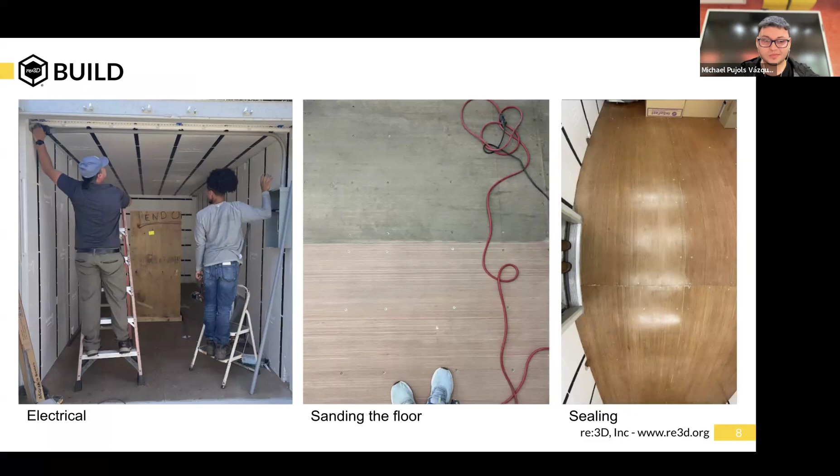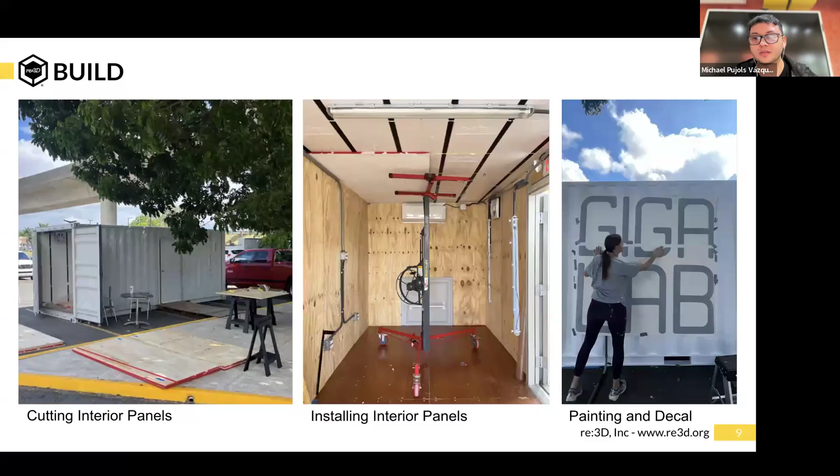The Giga Lab arrived with the two bots and a granulator, which are the basic tools to start, but we needed to outfit it. We started with electrical. I sanded the floor, sealed the floor, cut the panels, and put up the ceiling panels. Samantha helped me out with painting and adding the decal, so now it looks kind of presentable.

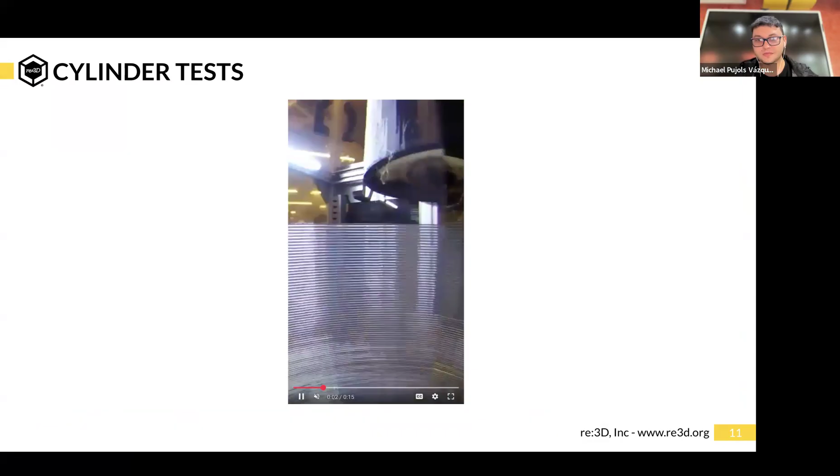It's a very cozy working space for creating different designs. But before creating designs and testing materials, we started with a very basic cylinder test. That's how I spent a couple of hours just trying to tune different temperatures for the materials. I started off with pelletized rPETG from recycled water bottles.

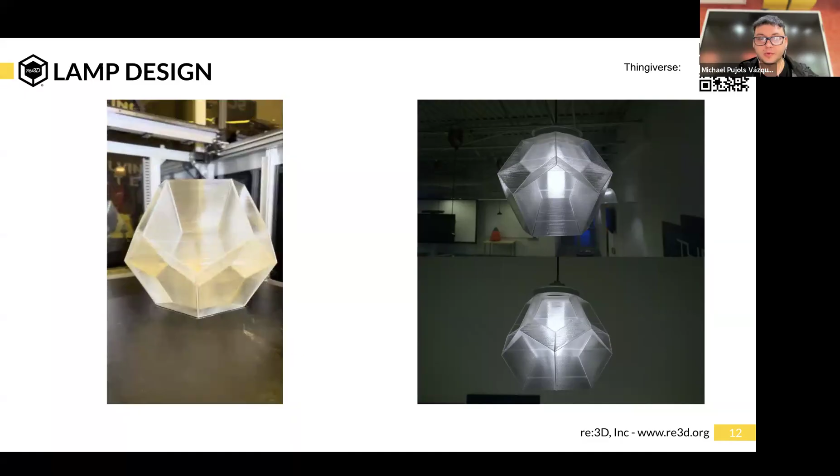I printed it with an 1.8 millimeter nozzle, with hopefully dried rPETG at that time. It was a lot of learning experience with this one as well, because I had to design the tool path so it wouldn't bridge with itself, while maintaining the walls as thin as possible so the light could come out.

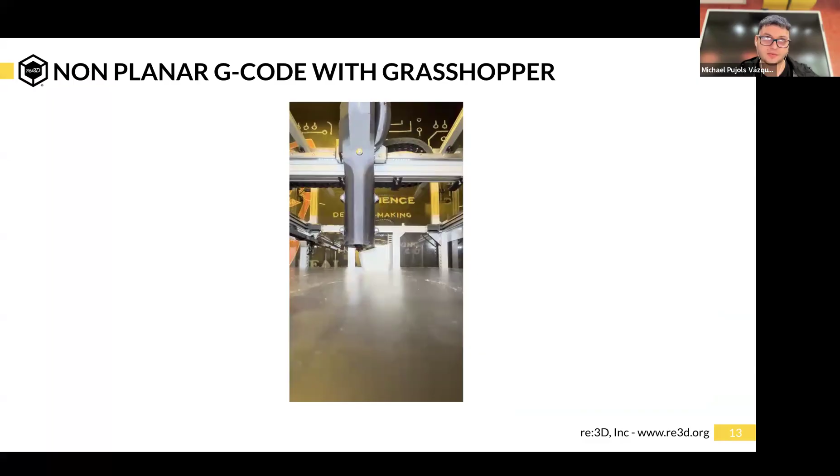After this, I tried to tackle a challenge I had in mind: can we 3D print non-planar on the Gigabot X? And the answer is yes. It's also more complicated than I thought it would be.

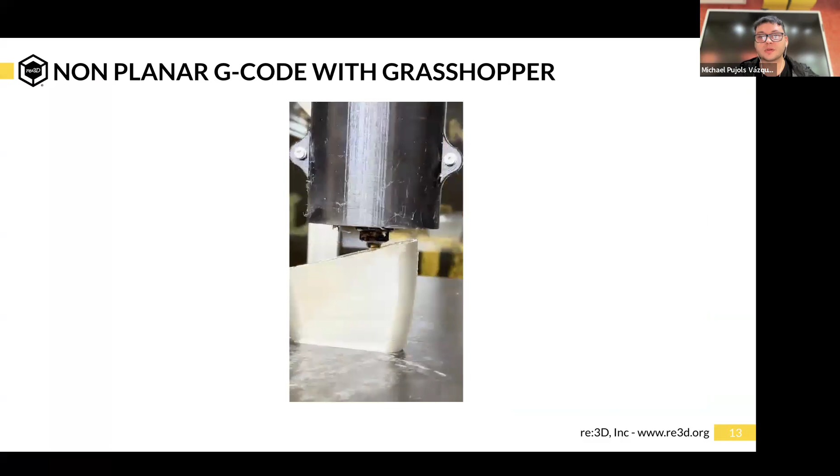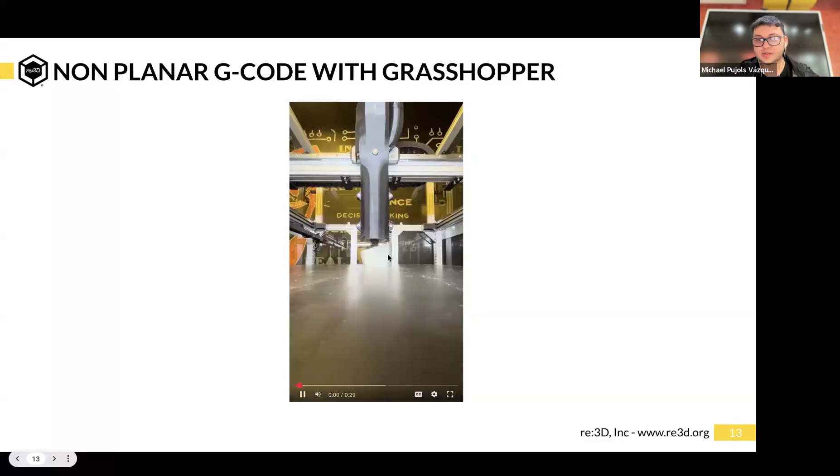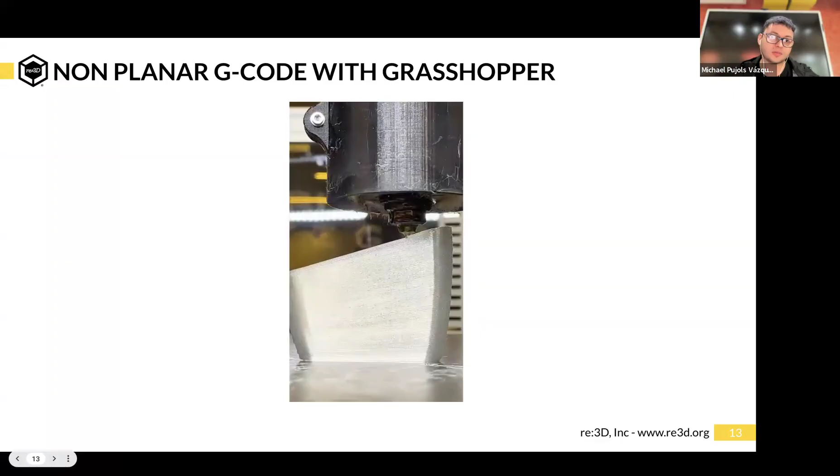A lot of this process isn't just about the speed of the printer, but also extrusion speed around the corners. As it goes down, it starts to create pressure and material buildup on the nozzle, and as it goes back up, it starts to over-extrude because of that buildup on the back side of the print. It's not really visible there, but it's an issue that changes depending on the geometry of the part.

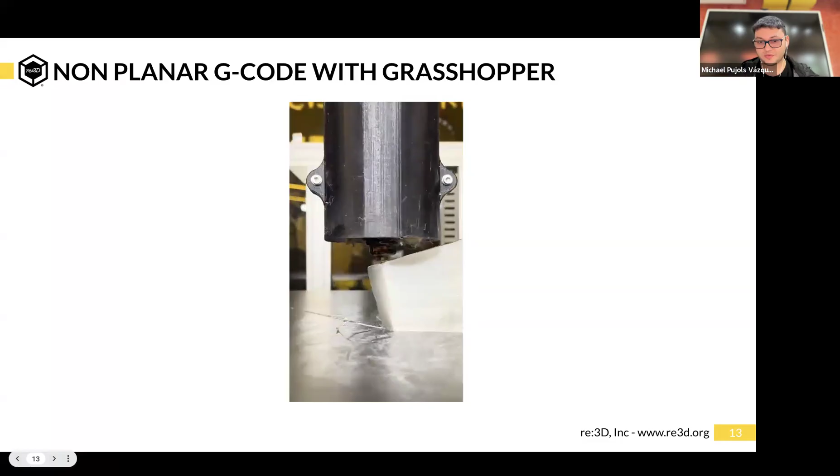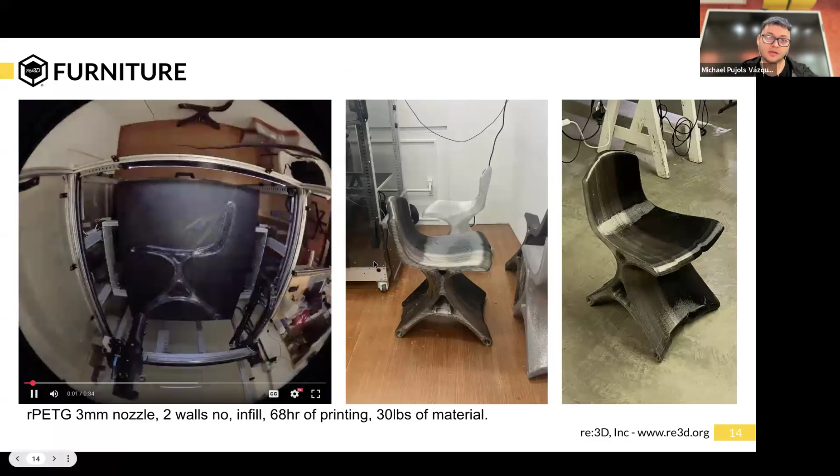I wanted to try this out as a small test, building a chair with this sort of geometry, starting with non-planar layers so that each layer could properly support the chair. Each layer would be continuous, or the same length in theory, instead of being shorter lengths as it goes and builds itself.

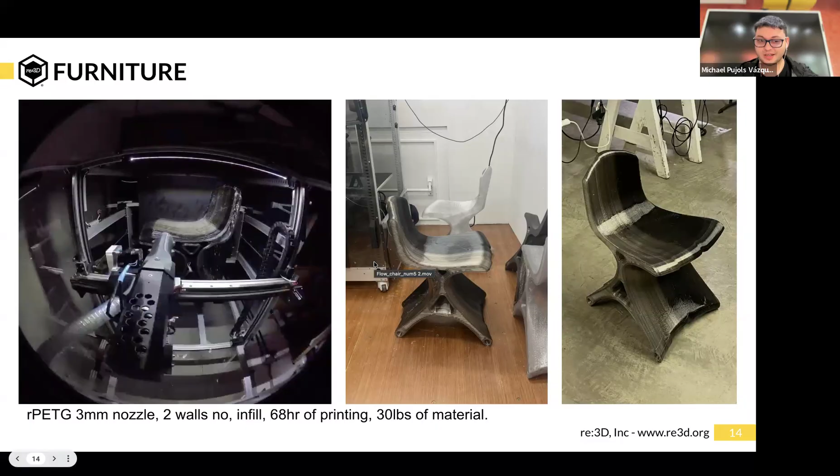It was a lot more challenging, so I ended up going with the normal planar, layer-by-layer printing instead. I printed a bunch of chairs. A couple of them didn't print completely because the electricity went out a couple of times.

It took 68 hours of printing and 30 pounds of material, with a lot of time in between each attempt. But this one finished. I got to finish this chair, and after a couple of hours sitting on it, I asked a friend if he could test it for me.

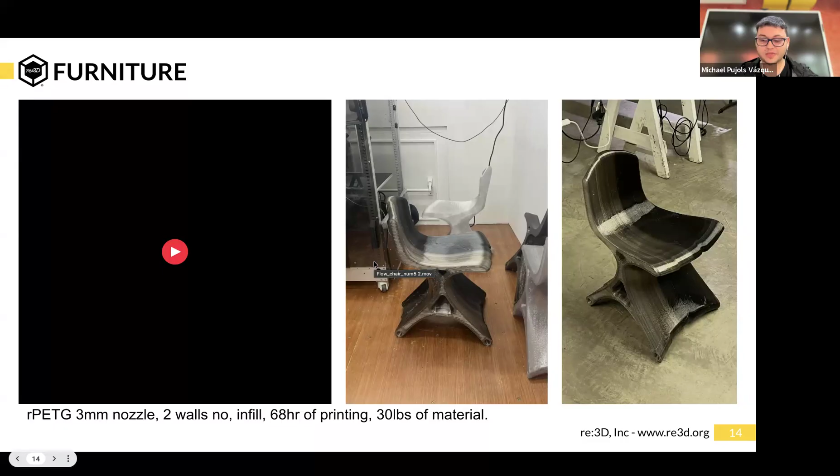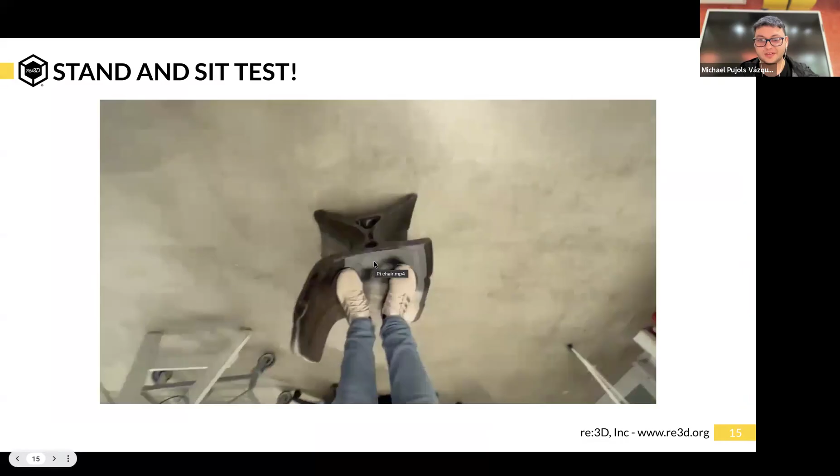He's a little heftier, so I asked him to sit on it and help me figure out how to break it, because that's part of the process. This is the chair itself, and here I'm demonstrating how it could hold weight, at least my weight. I got to stand on it and sit on it for a bit—I like the backrest, it actually helps out a little. But when my friend tried it out, he instantly broke it.

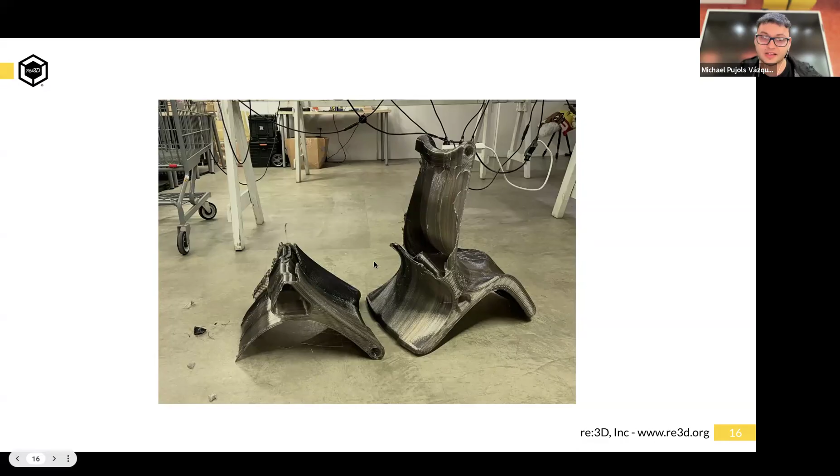He told me he only used about 10% of his power. The only thing he did was put his foot on one of the corners of the chair. I should have done a finite element analysis on that to see if that corner would have taken that much force, but lesson learned.

Before printing, try doing a finite element analysis on the design. After this, I wanted to try out a different design and learn to what extent the printer can bridge to a certain height. I came up with a design where each of the legs converge at the top and create a little bridge that becomes the footrest area for the stool. It worked pretty well, and I got away with at least halving the amount of material from the other chair. Instead of 30 pounds, it's 15 pounds. Pretty good progress.

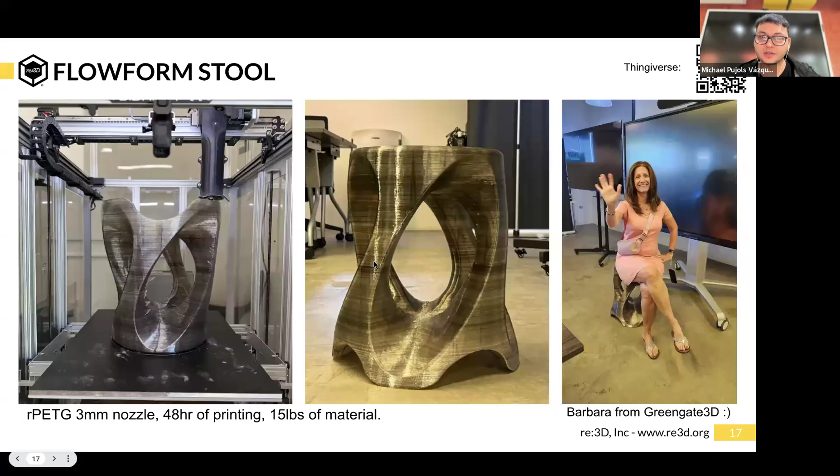It did sort of work, until the wind started to pick up really heavily, and then it went up, and as it kept getting higher, it snapped in half and fell, and I almost hit somebody. That person wasn't really happy with what they were looking at.

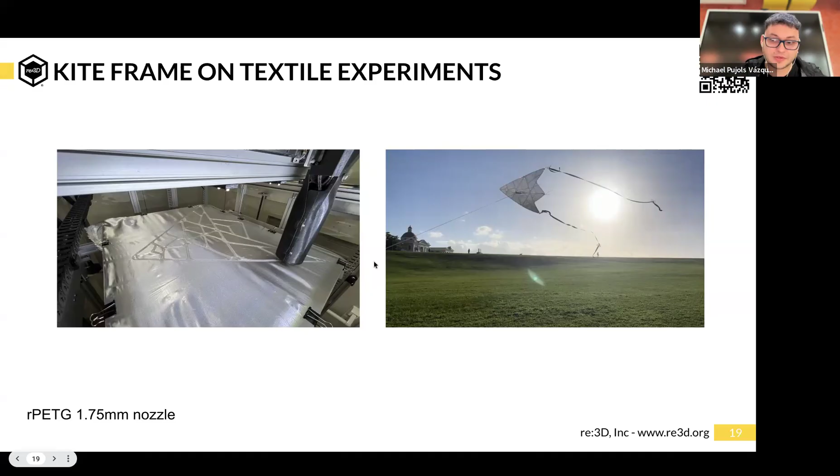Jumping again, this is a really cool project that started with the GigaLab, more of a collaboration with Emely. She had a rotationplasty surgery because she had osteosarcoma on her leg. So she got amputated, and rotationplasty is a very interesting surgery where they basically cut your leg, cut your foot, rotate your foot, and weld your foot onto where your knee is at. So the ankle works as the articulation, as if it were your knee.

Osteosarcoma rotationplasty amputees have very unique geometry for a prosthetic. Since she was very young when she had the surgery, her dad wanted to design a cover for this prosthetic to mimic the shape of a leg, so it could help her develop a relationship with that process.

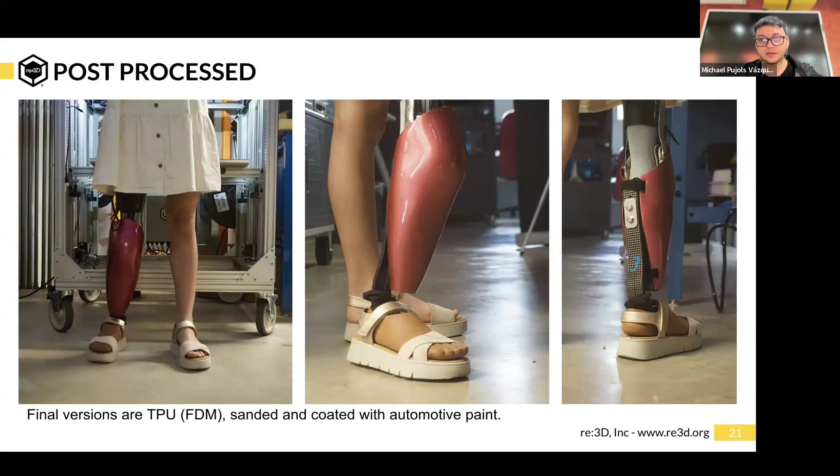But we started prototyping with TPU and got great results. We started printing FDM TPU, and we also post-processed that TPU with automotive paint, and got a design for her that she feels really good with. So good, in fact, that she travels from Puerto Rico to Boston every couple of months to change out her prosthetic leg.

But also her friends wanted a similar cover, so we got to make her friends the cover for them as well. This is one of my favorite projects because it involves so many things from 3D scanning to 3D printing, and also that post-processing part of sending over the TPU prosthetic leg cover and getting it painted, and seeing how they feel with the cover is very gratifying in that sense.

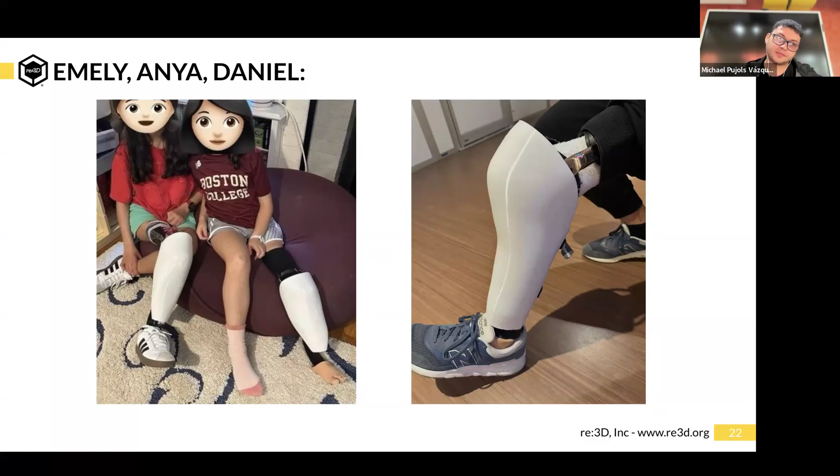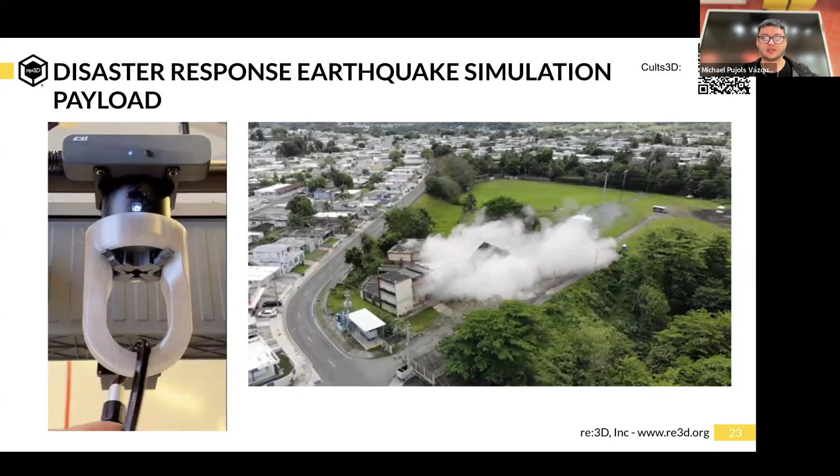And so this is a very random project. The mayor of Bayamon came over and dropped this huge drone on a table and told us, "Hey, I need you guys to design a part that would hold a care package and drop it if there's an earthquake happening. And there will be an earthquake simulation in a couple of weeks, and we kind of need this for that demonstration." And this was a whole thing.

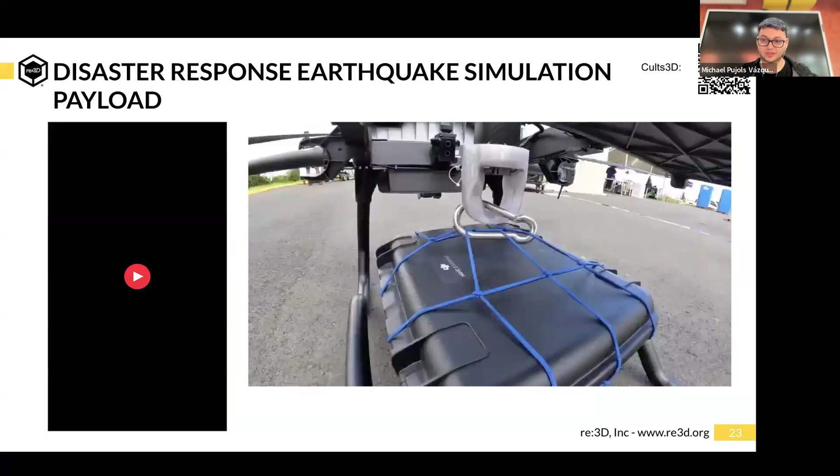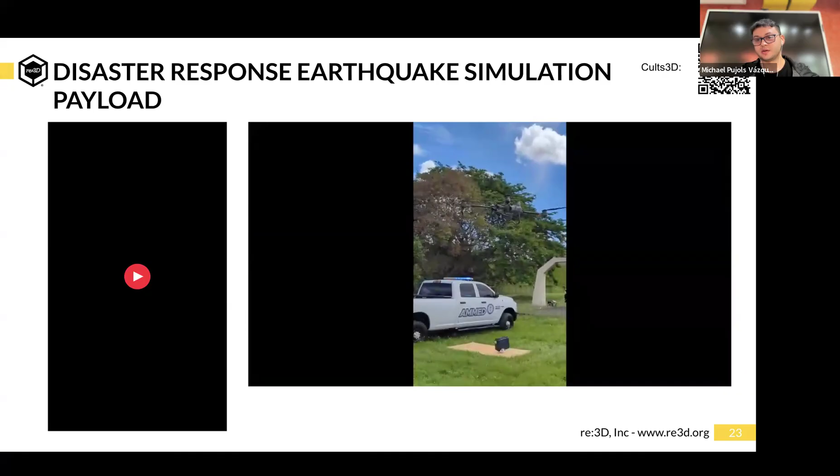They demolished the school and hired a bunch of actors to play as if that whole earthquake was happening. And this is all just a demonstration of how disaster response could aid in an earthquake. So they also had ambulances come by and police and a bunch of stuff, and it was a whole thing.

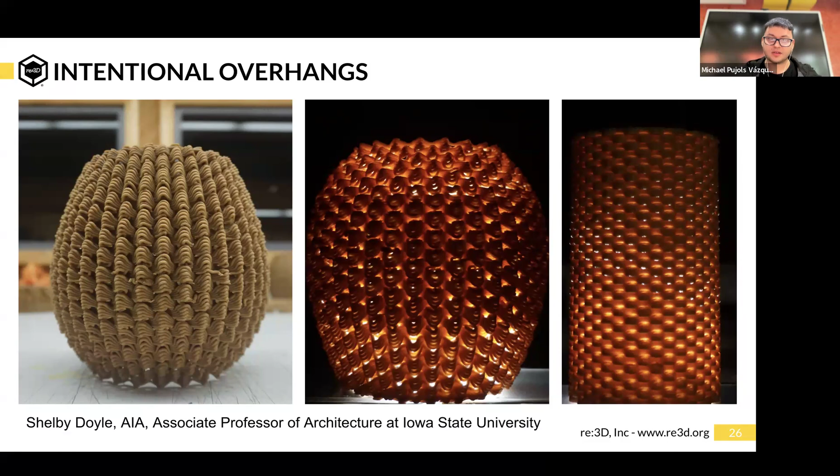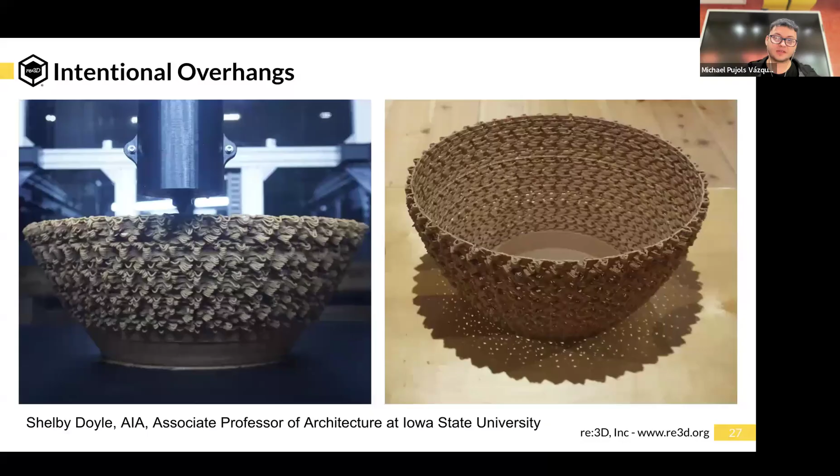And this is another one. This is a bigger sort of weave basket. It kind of looks like ramen. It's not. This took about all night to print, about 8 hours. Yeah, it was a really interesting experiment.

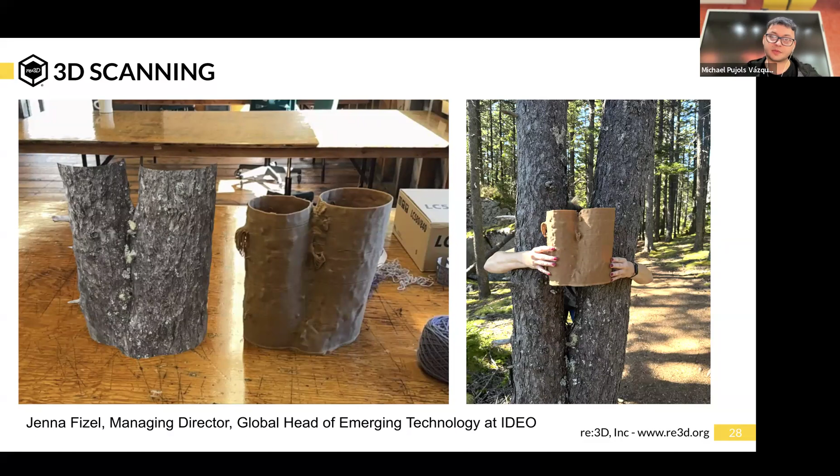Again, one of those things that happen when you gather a bunch of interesting people together. As it was basically a hackathon, there were a lot of coffee mugs around the studio area, and we had to take those mugs from the studio area to the kitchen every day, but they started accumulating over time. So I designed a coffee mug for that specific problem, because we were too lazy to bring the coffee mugs back from the beginning. So at the end, we had too many coffee mugs.

And the kitchen staff loved it. We made a couple of them for them, because it appears that sort of problem happened before with other labs and other workshops. So I got to leave a little bit of a design there as well.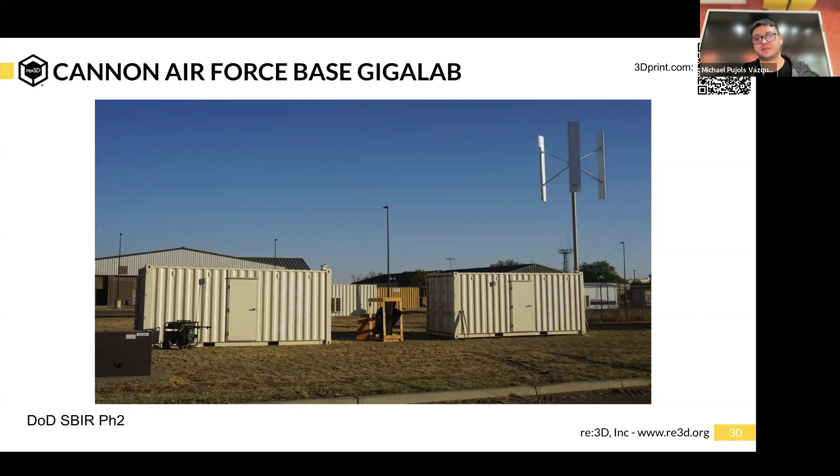So now jumping from Haystack Mountain over to New Mexico at Cannon Air Force Base. This is a DoD SBIR Phase 2, another GigaLab project. It's a really cool GigaLab because this one is powered, at least the right container is powered, with a wind turbine and batteries. And then the left one is powered by a generator because the granulator needs a little bit more juice.

But this was a really cool demonstration where we got there, set up the wind turbine, got the batteries running and the printer working, and got to train airmen how to use Simplify3D to 3D print their models. A lot of them wanted to print things that were a little difficult to print on the GBX, in the sense that the tolerances for these parts are designed for smaller nozzle sizes. The GBX goes from 0.8 millimeters to about 3 millimeters that we've tested.

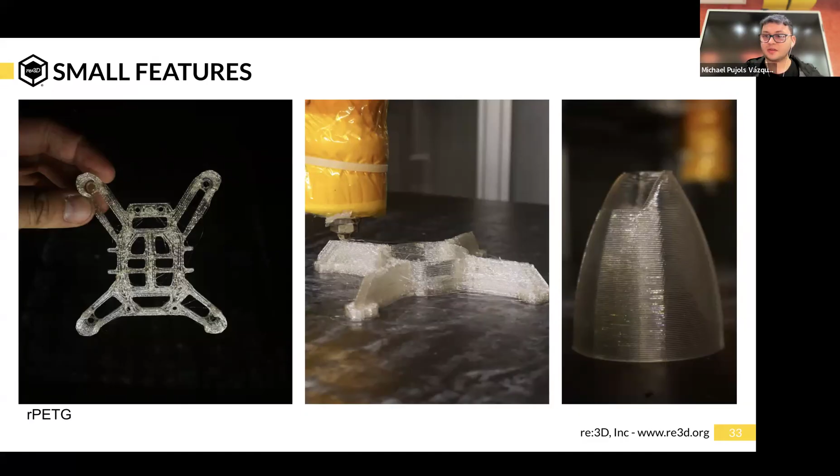And yeah, they wanted to try these out. We printed them out. The features were too small, and also in this case the PETG was not dry as well. But a lot of learnings from this as well, at least for them, to show them that you also need to design for the machine or the constraints of the machine, not just take a model, throw it at the printer and see what happens, sort of thing.

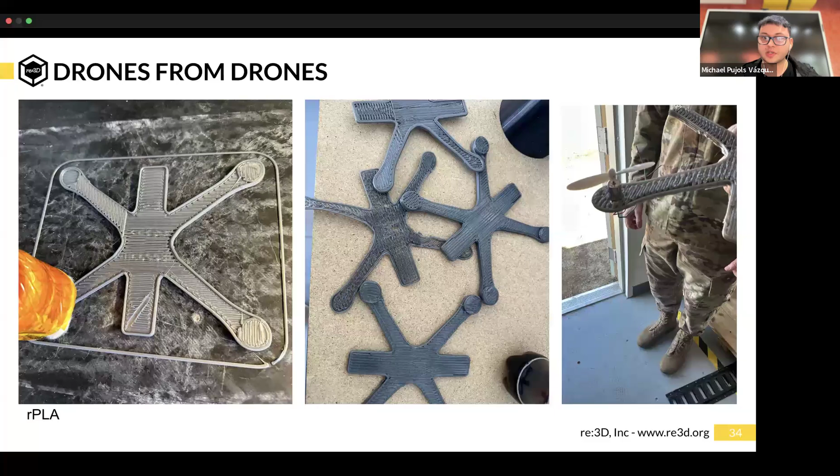And then from that project, we took material from discarded drones and 3D printed drone frames. This is also a very interesting process where we got to show that if you get the right geometry and the right tolerances, you can actually get a good result. And the team got to fly a 3D printed drone from this, which is really interesting. A production of drone frames can be done in under 30 minutes, which is fairly quick. You can have different iterations and churn out designs pretty quickly with this nozzle size.

And also we got to design a cable management little strap, a suggestion from a staff sergeant that works with the cybersecurity department. She wanted to design this little strap thing, and we got to do it on site as well, which was really cool.

And then jumping from New Mexico over to the Pacific, thanks to America Makes, we got a booth at PACIFX, which is a conference where a lot of DoD and companies get to show off the technology they're developing. At this Pacific conference, we got to show off the GBXS printing our LDPE foam that will eventually be used for packaging foam for the International Space Station.

It's really cool to show off a lot of good ideas. Some people suggested maybe doing this sort of system configuration for submarines and that sort of thing, which was really good feedback. But Patrick can attest to how this project is going. If you haven't seen Patrick's presentation, you probably should go watch it. It's really cool. He does a lot of really cool NASA stuff.

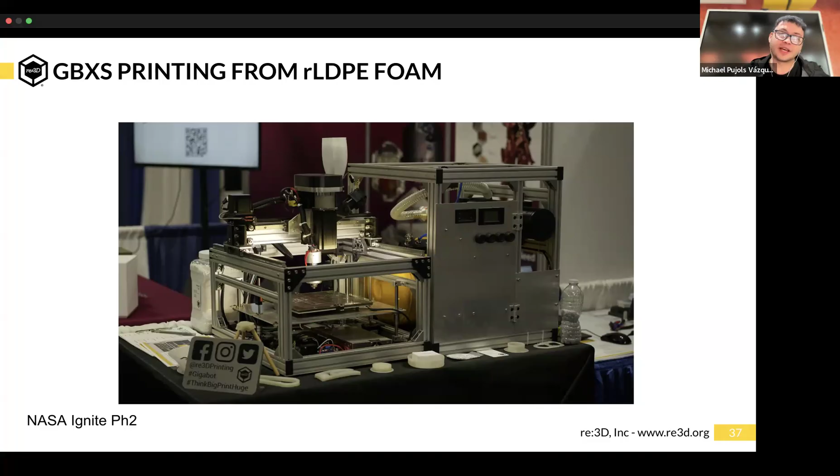And at the end of the week we got to show a lot of the demo parts we make for DoD at the PACIFX demo, which was like a 3 hour demo. Got to print out drone frames. A lot of the learnings that we took from Cannon Air Force Base, we got to showcase here. There were a few drone frames that we got to print out every 15 minutes or so as we were talking and demonstrating, from granulation to actually printing on site, which was really cool.

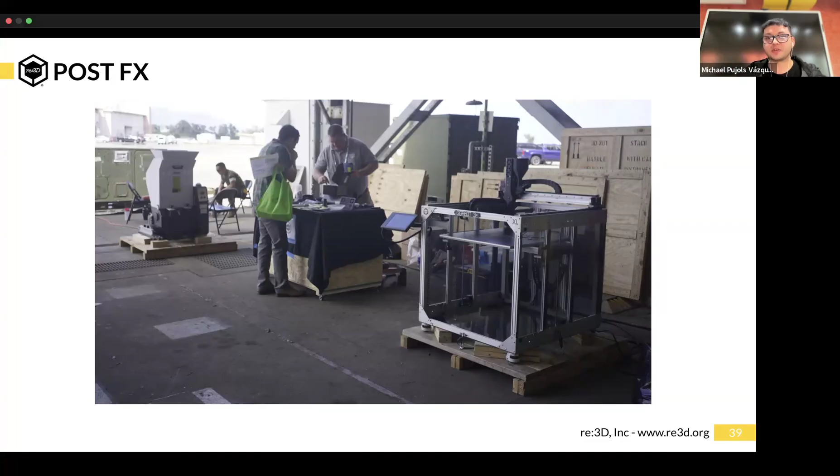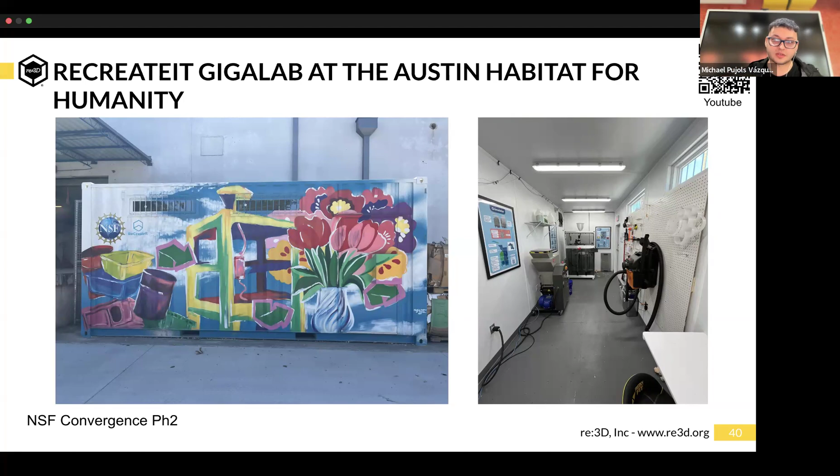And then jumping from Hawaii over to the Austin Habitat for Humanity ReCreateIt GigaLab. This is a really cool project that starts from an NSF Convergence Phase 2 grant. So in the interior of this GigaLab, you get to see how maybe building out the GigaLab from scratch isn't the best starting point. It's a really good thing to have an already built out GigaLab, and you can have it running parts. The team at ReCreateIt are doing awesome things with the GBX. They're actually making things and selling them at the ReStore, which is amazing.

It's a really good demonstration of how you can take donated waste to actually sell them at a local shop, and that's super cool. And so relating to Austin and design and that sort of thing, I got approached to maybe help out a little bit and design something that could be related to Austin. And I got a list of things that I have to make for the ReCreateIt team.

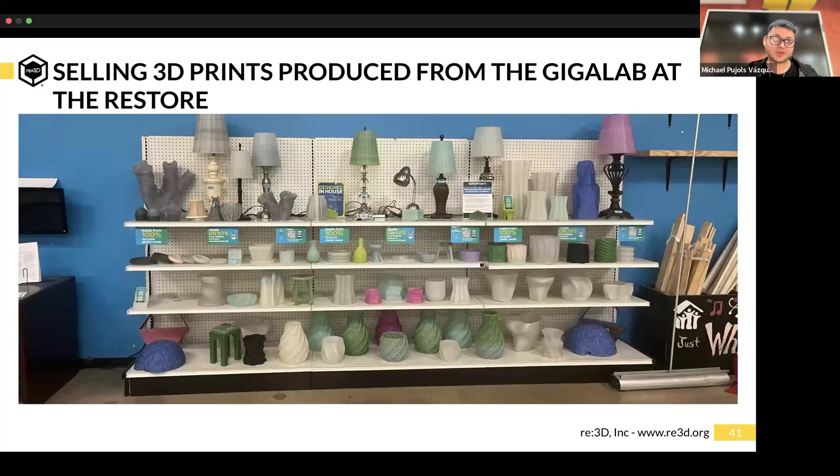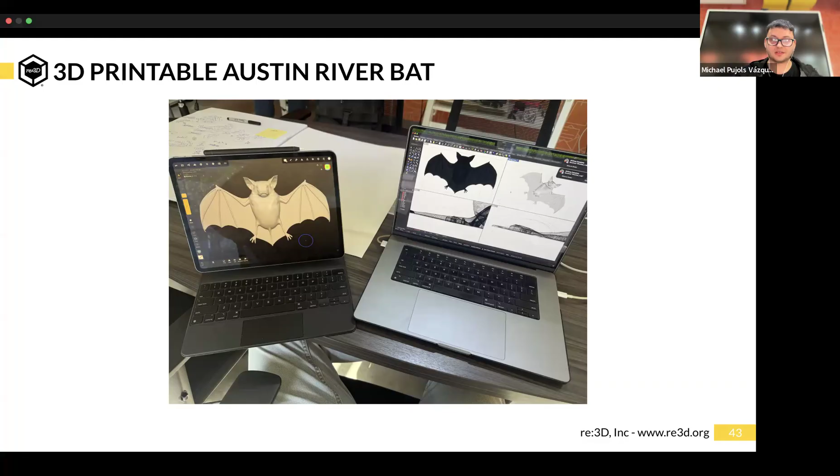And I got to learn a lot from this as well in terms of material. I got some recycled polypropylene from local industrial waste, and tried to 3D print my own design on the GBX and had no success. And basically, I started asking Chris what am I doing wrong, and if he can help me tune the design a bit. And basically he gave me a lot of really good guiding principles.

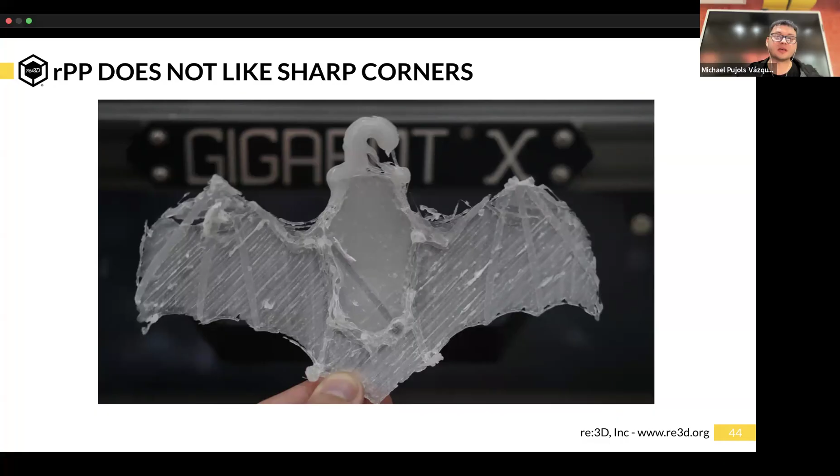RPP doesn't like sharp corners. This design had a lot of sharp corners in the wings. So it started to drag material from the corners, and basically would come loose from the print bed even if I put adhesive on it. And so I edited the design a little bit. Still has a little bit of sharp corners on it, but even less so that the design could sit a little better on the build plate.

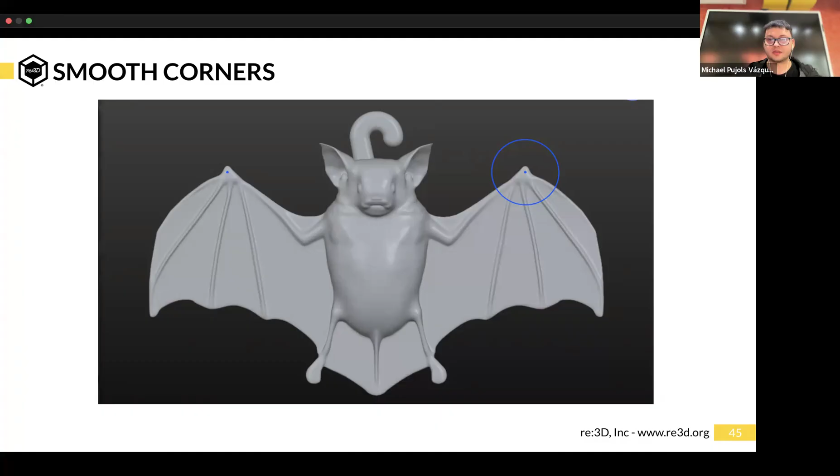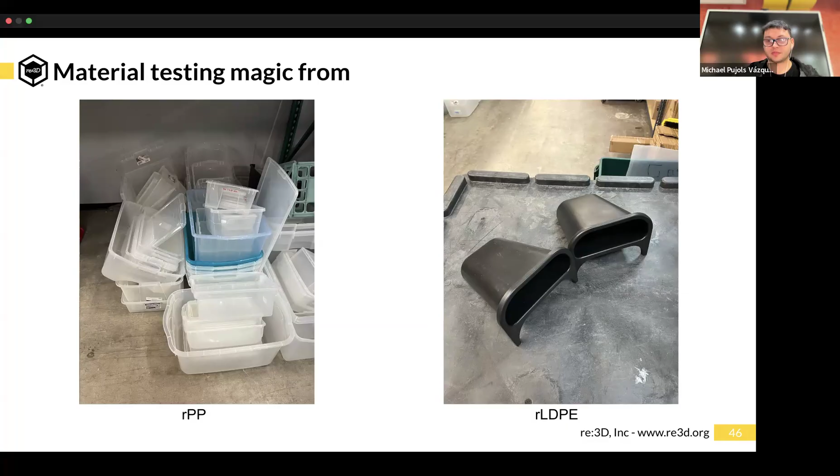It could also be material. There could be a material thing happening there where maybe the RPP that I have, the thermal cycles are a bit different than the other ones, but it's coming out really good at re:3D. So the re:3D team has these materials so far. They have tote containers, and these little containers that are made from RLDPE. And Chris did an amazing job with 3D printing these things.

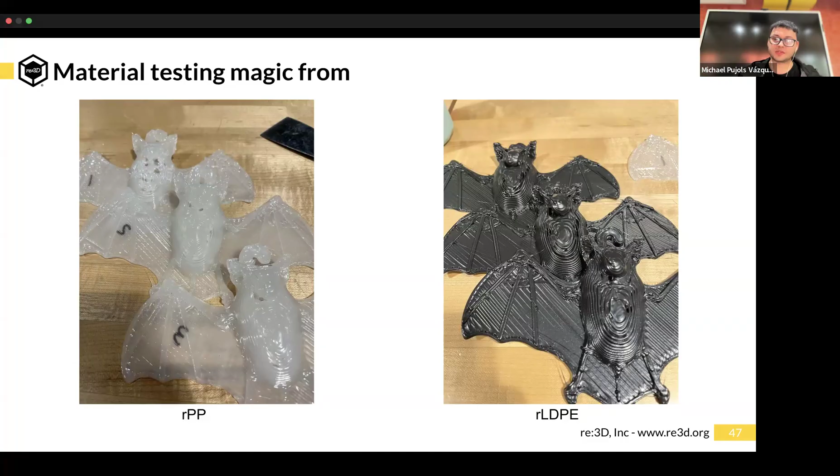And it's a really cool process to see how maybe something that I don't really quite have working here, but also sending off that design and getting feedback and seeing how that can work across the pond, if you will, remotely is really cool to see. So with that,

So basically with that, I wanted to emphasize how this whole process wouldn't happen. All these learnings from design wouldn't happen without our ethos and how we take this pretty seriously, and yeah, there's a lot of work that happens at re:3D to get these things right. So I hope that kind of shows off how this little network of labs collaborates, and we get to learn a lot from it. Thank you.

Mike, thank you so much for that wonderful presentation. It's so cool to see how the projects have intersected and you've influenced their development. Does anyone have any questions for Mike?